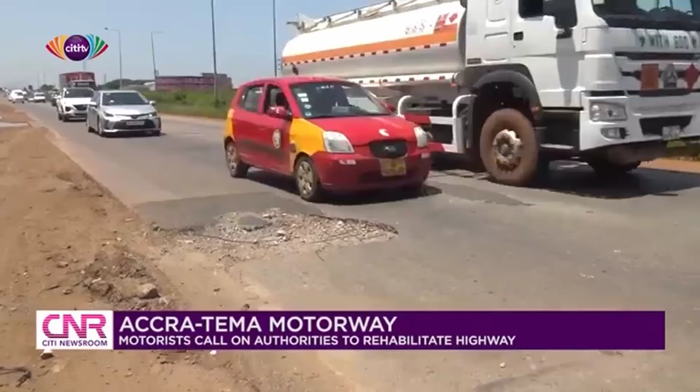Beyond its design life and capacity, the once pristine expressway has become riddled with potholes, contributing to difficulties driving. One needs to be extra careful when driving on the Accra Tema Motorway. The road, constructed over 50 years ago, has become very difficult to drive on because it has been taken over by potholes, patches, and bumps.

Apart from the factories, Martin Esiedunate also throws a spotlight on the Tema Motorway, one of Kwame Nkrumah's foremost projects. Take a look. 57 years since its construction, no major work has been undertaken on the stretch. It was constructed by Dr. Kwame Nkrumah's administration in 1964 and opened to motorists a year after.

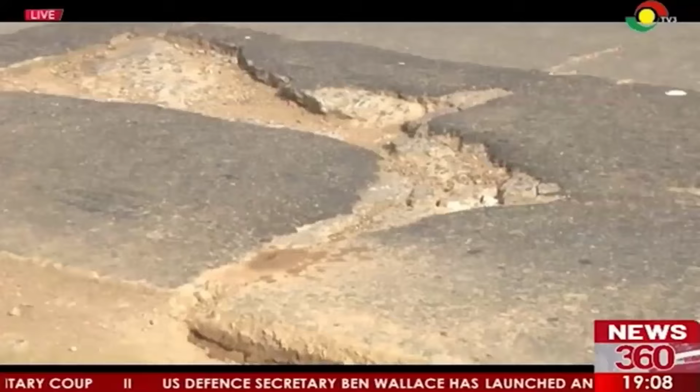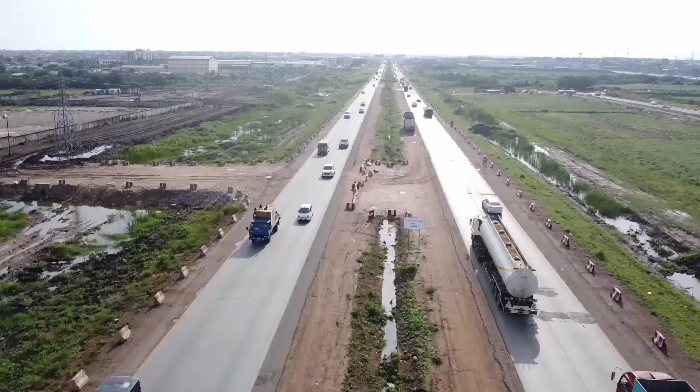It is the foremost link between the harbour city of Tema and Accra. This strategic asset, delivered by Ghana's first president, Dr. Kwame Nkrumah, requires an upgrade that will usher Ghana into a new dawn of connectivity where businesses and economic activities thrive through a reliable road network. This must be done with limited to no interruption to daily activity of road users.

This led to the conceptualization of the Accra Tema Motorway and Extensions PPP project, which runs from Tema to circa Accra, a 27.7 kilometer project linking N6 and N1, divided into sections as follows.

Section 1: the 19.5 kilometer Accra Tema Motorway and extensions on Liberation Road from Old Polo Junction to Emmanuel Eye Clinic Junction. Section 2: the 5.7 kilometer George Bush Highway to Apenkwa Interchange. Section 3: N6 linking to the N1, 2.5 kilometers from Tesano through Apenkwa Interchange to Neoplan.

The Accra Tema Motorway and Extensions project could not have come at a better time. Fast forward to 2024, the government cut the sod for the commencement of the reconstruction of the 19.5 kilometer Accra Tema Motorway and Extensions PPP project. This was pursuant to a strategic decision to deliver the project under a public-private partnership.

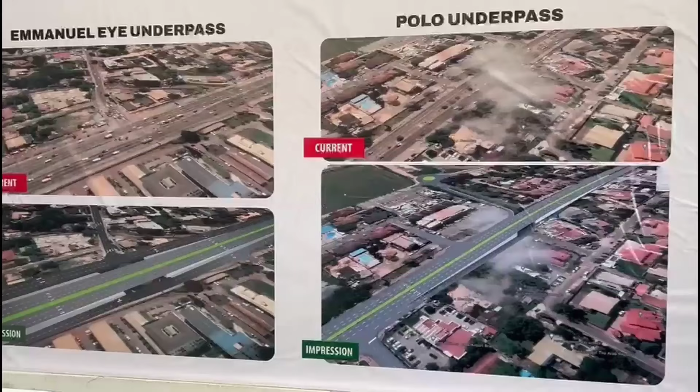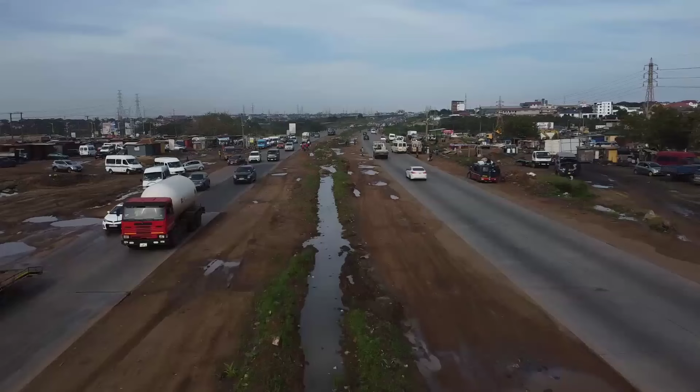This novelty in Ghana's road sector is underpinned by a concession agreement between the Government of Ghana, acting through Ghana Highway Authority, and ATE Expressway Limited, where the latter is responsible for the financing, construction, operation and maintenance of the road for 30 years. ATE Expressway Limited, a creation of the Ghana Infrastructure Investment Fund, ensures that maximum funds are raised from the market, but majority ownership remains with GIIF on behalf of the Ghanaian people.

I express my heartfelt gratitude to the officials and professionals from the Ministry of Roads and Highways, the Ministry of Finance, the Office of the Attorney General, Ghana Infrastructure Investment Fund, and consultants, whose tireless efforts have brought us to this moment. It is instructive to note that the Accra Tema Motorway, which has served the country since its construction.

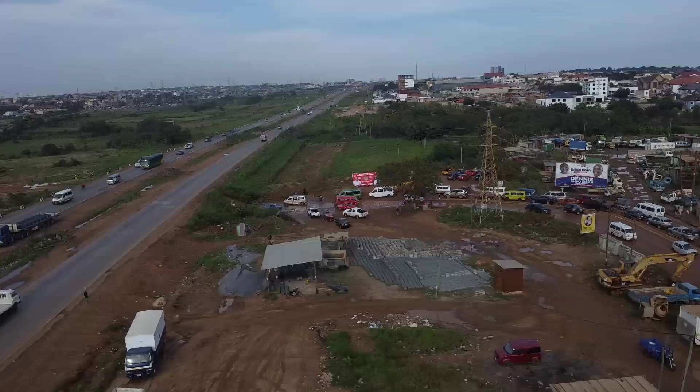Day in, day out, there's an accident on the motorway. This is due to...

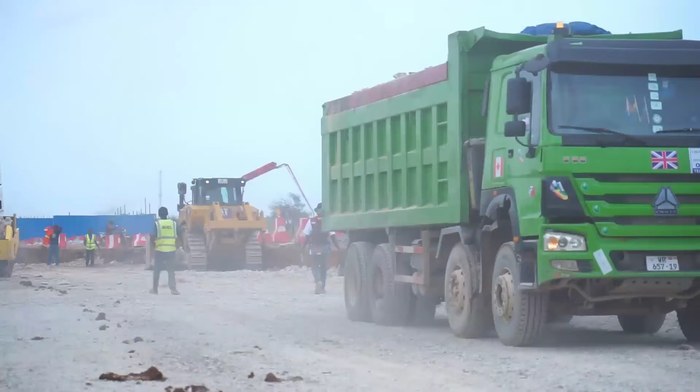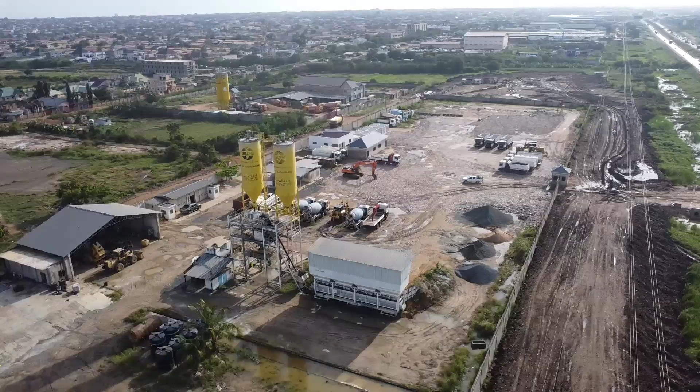Has been quite remarkable. As I said, it's on track according to the works program. Indeed, the first 6 months was designated for the design. But because he is a local contractor, he has been able to combine the design period with some early works, as we can see.

Key components of the 19.5-kilometer phase of the project include reconstruction of two fully access-controlled two-lane concrete paved expressways, construction of two partially access-controlled three-lane asphaltic paved urban highways on either side of the expressway serving as service roads, and reconstruction of Tetteh Quarshie interchange.

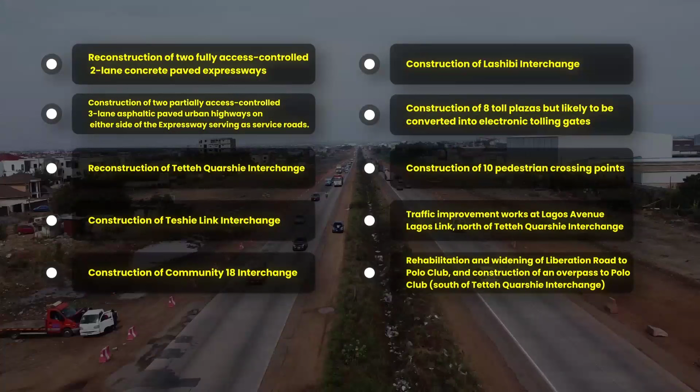Construction of Teshie Link interchange, construction of Community 18 interchange, construction of Lashibi interchange, construction of 8 toll plazas but likely to be converted into electronic tolling gates, construction of 10 pedestrian crossing points, traffic improvement works at Lagos Avenue, Lagos Link, north of Tetteh Quarshie interchange, rehabilitation and widening of Liberation Road to Polo Club, and construction of an overpass to Polo Club south of Tetteh Quarshie interchange.

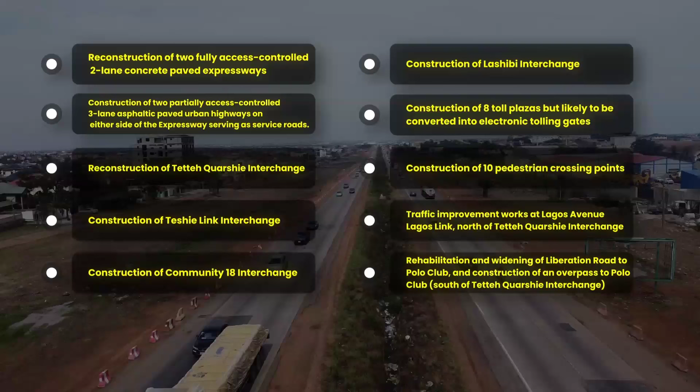The project is very good because when you think of the future, it's a boon. But for now, I think the contractor may be moving a little bit hurriedly. The expansion of the road will at least ease a lot of traffic.

That is one main thing on this road now. Sometimes around early in the morning, from let's say 6:30 p.m., and early in the morning around 6:30 a.m., there's serious traffic, both going and coming.

We will engage government at any opportunity that we have to tell them that the right thing should be done. And with the pedestrians and drivers, as I said, education. Once they are made aware that if they do the right thing, accidents wouldn't happen.

And then even they are also part of the maintenance, because if you are driving and then you park anyhow, leakages and other things, that also affects the quality of the road. So education, and getting them to do the right thing.

And we as traditional leaders will also add our voice to ensure that the right thing is done. Stop work should be a no-no. No matter which government is in power, at least if we are able to appreciate the urgency or the importance of projects and see the need.

If you read political meanings into everything, we will not make any headway. So it's important to observe this principle of continuity. That will guarantee a better atmosphere for us to live in.

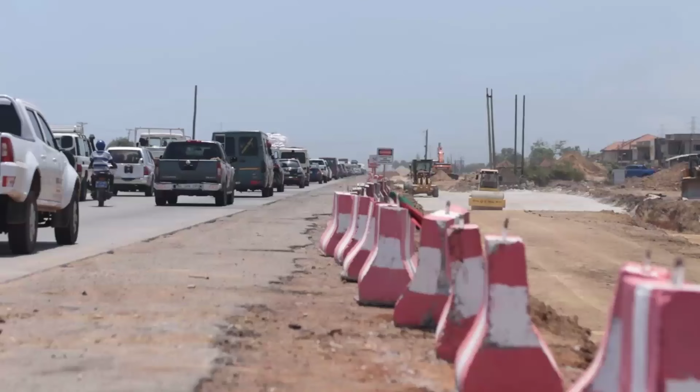We call them Jersey barriers, those big concrete things that you see. Those are the demarcating barriers that we have for now. And what we are doing now, sometimes the reflective part is gone, so we are repainting.

And we are actually, in the night, you will see some light on those Jersey barriers. So that is just for safety measures.

We have a dedicated team on the ground who are ensuring works. We add that a lot of the challenges that sometimes we have with road deterioration also have to do with the use, because roads are designed for a specific purpose, obviously for transportation, for a specific weight class, for a specific number.

So my appeal to motorists is that please let's exercise the greatest caution on this road whilst construction is going on, because we are constructing not for ourselves, we are constructing for you, and therefore there's a need for us to collaborate and work together for the good of the country.

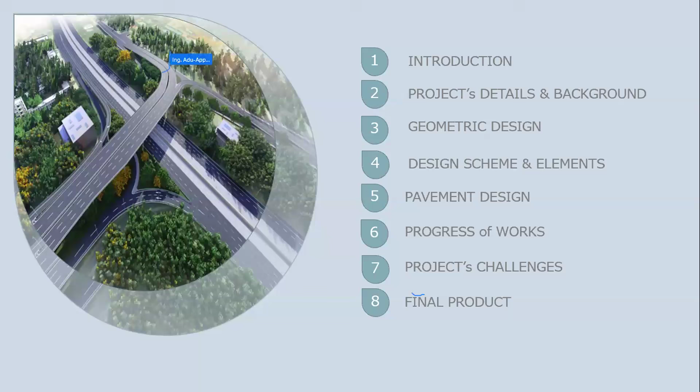I know for those of you who have passed this road, you may have seen quite a lot of work going on. But then it's all jagged up, and you probably might not be aware of it.

And we will then talk about our challenges, because when we are doing these things, some people think that everything is smooth sailing. I know for you engineers, that road construction in Ghana is not that easy, especially when you are working in an urban area.

So we'll then go on to give our conclusions. We already know who the employer and the funding agency is. You heard that this is a PPP. I know some people have questioned where is the other P. I did mention to you that, yes, the private sector is reluctant because they foresee risk when this has never been done before. So the special purpose vehicle company, that is the AT Expressway, is fully funding the phase one, that is the construction of the phase one.

And I'll be explaining to you, and I guess you've seen we have phases 2 and 3. But then they will fully fund the phase one through GIIF, that's the Ghana Infrastructure Investment Fund. And they will then go to the market, because the market will see that yes, we've been able to construct 19.5 kilometers of the 27.7 kilometer road. So they would come forward, and I understand some people had shown interest until a few things happened. So that then they will come and put their money for the rest of the project.

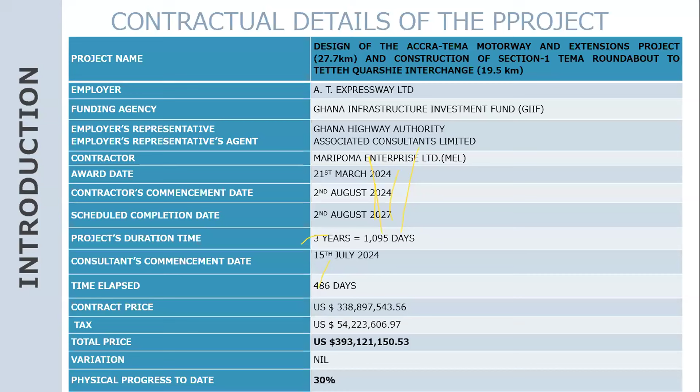Some people are only interested in the contract price. It's 338.9 million with a tax component of 54 million, making a total price of 393 million. So far, we've done about 30% of the project.

The project background: this is part of the national routes. So let's say route Ghana - the Ghana Route 1, which is the N1 that we all know, N4 which is the Aburi Road from Tetteh Quarshie, and the N6, the Accra Kumasi Road, and of course it continues. Then the other arterials, we mentioned the Liberation Road and the others.

The whole idea is that you also want to improve mobility and accessibility within this area of Accra, Tema, Aburi, and the Samam roads, and also to enhance regional integration.

This is the main route from our eastern neighbors to our western neighbors, Togo, all the way to those northern countries. If you want to go to La Côte d'Ivoire, the N1 continues all the way there. And if you branch off on the N6, you can go to Burkina Faso, Niger, and some parts of La Côte d'Ivoire.

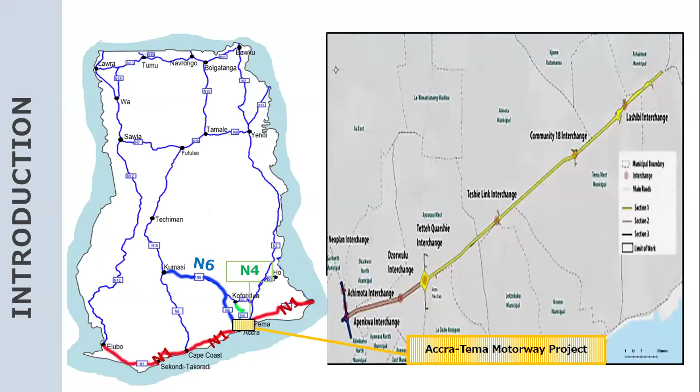Our scope is to rehabilitate and expand to a minimum of 10-lane divided highway as a minimum, and comply with the level of service requirements. It will have 2 fully access controlled...

Expressway - so currently the rigid pavement, meaning the concrete paved section, will be an expressway, which is a 2-lane dual carriageway. Then we'll have a 3-lane urban highway in asphalt, which we'll call the service road. The service road will not be access controlled.

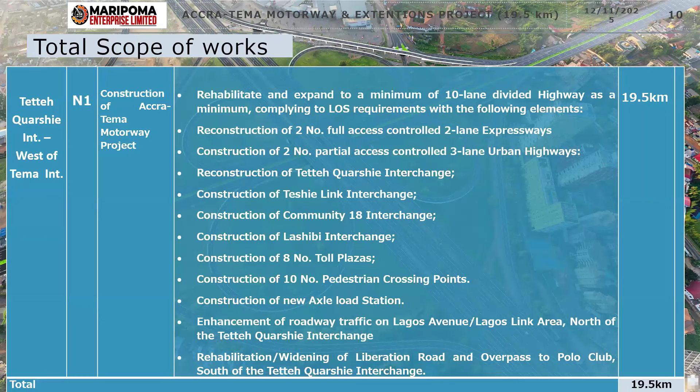Many years ago, I visited a certain country, and as a student, it was a shock for me. They had only about 30 kilometers of highway, and they had a whole operations and maintenance yard which had everything. So here the KPIs might be that from the appearance of a pothole to the repair of that pothole is, let's say, 24 hours. So if anything happens, it is repaired immediately. A stitch in time.

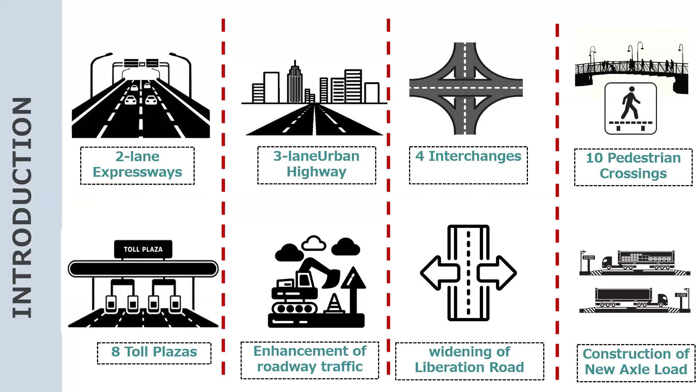Again, still trying to push down what we are doing. So we are having various elements of the general layout, and you see the various facilities are provided. You have the Tetteh Quarshie, which we all know. There are footbridges at various locations. Teshie Link interchange comes first. We have various footbridges along then the Lashibi. We know the Lashibi interchange. Then one, we are not touching it, so that is not going to happen.

So let us just look a little bit at the geometric profiles. I'm just showing you a plan. This is the flower pot, kilometer 2 plus 900 to 3 plus 090. That has been completed, and we can see the profile there. And then we have another one here at kilometer 5 plus 700 to 6. That is a Teshie link that will join to Manet.

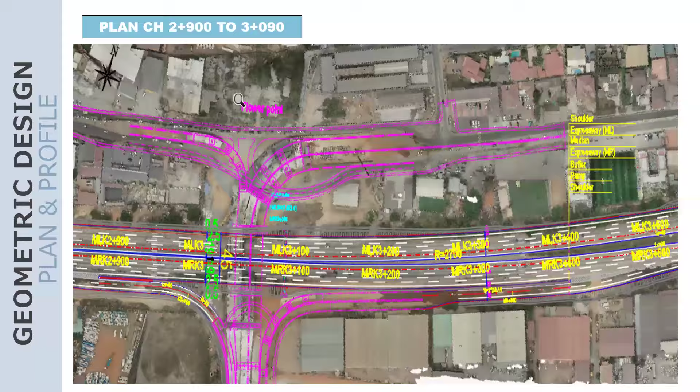So the main carriageway will be in there, that is the expressway, and then the urban highways will be on either side. So if, for instance, you wanted to go back, you can just come to the roundabout. This is what we call the dumbbell interchange. So you come here, and then you can go out again. Or if you want to continue to the various locations, this one will link you to the Spintex Road.

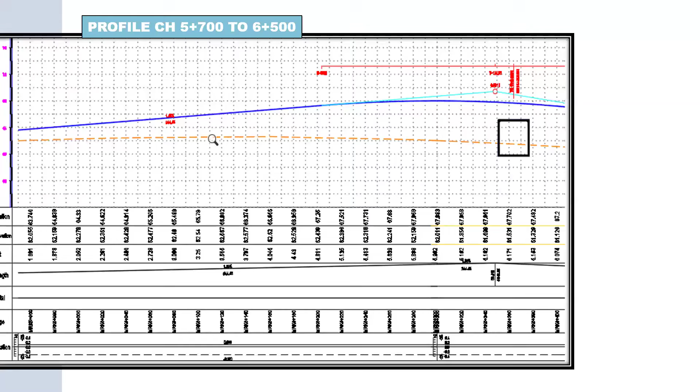Okay, now let us look at the existing rigid pavement, which will be maintained, but we will do more of an overlay. This overlay has been designed for concrete, so this is the 2-lane concrete section, but asphalt will be on the urban highway.

But then there are certain sections which are going to be mixed, so we have mixed-use sections that will allow you to change from the service road or urban highway into the expressway or vice versa. So maybe you want to get off somewhere, you can come in there and make that move. That's where you'll find all 5 lanes together, and we have them at either end of the Accra Tema Motorway.

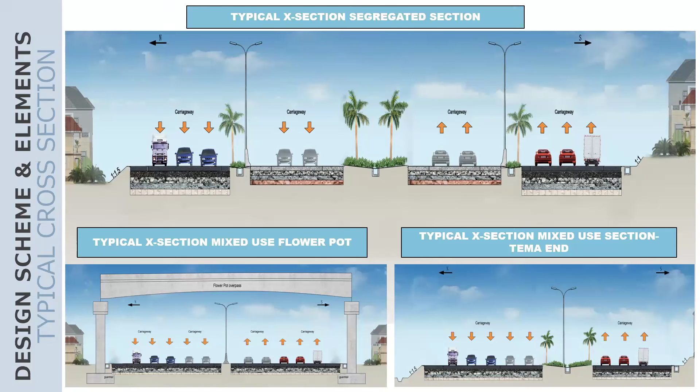Okay, continuing with Tetteh Quarshie, I told you we are expanding Tetteh Quarshie. For those who have passed through, we have already finished the substructure and are preparing to launch the superstructure very soon. Once the beams are ready, we are using T-beams. I'll show you some interesting construction details, just schematic, so you know the process of undertaking these.

So for the Teshie link, currently there's no connection. We have to demolish some houses, and that will link to that area. This is how it's going to look like. So when Tetteh Quarshie is completed, this is how it will be.

Let me see whether this works. Now once you get here it wouldn't show, but anyway, let's move on. I can show here - currently this is what we are doing, this one and that. The middle one is already existing, so we are adding a bridge on either side of the existing motorway. This is how the construction would look like.

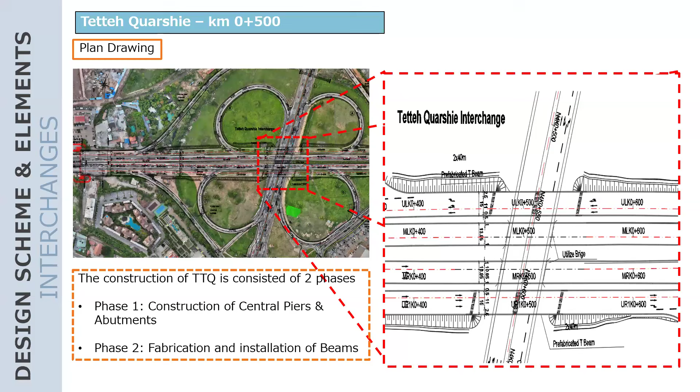And then we would have our T-beams, which will be launched. I'm sure you've seen some cranes being erected there. We will produce the T-beams there and they will be transported to the bridge - mostly when you are going towards Tema. That's how it's constructed, and as you can see, typical foundation, then your piers, and then your beam seats, all clearly shown.

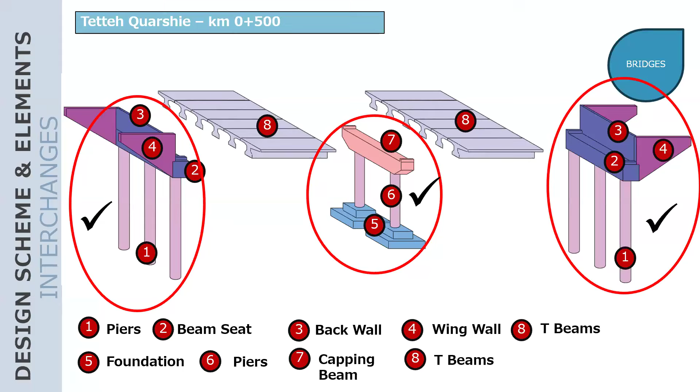Then for the underpasses, I believe you've seen some work going on there. Some are very far advanced, and we have done quite a few diversions - if you look carefully, we started by first building those on the urban highways on either side of the motorway. Once completed, we diverted traffic and started working on the road, which is why we are going round it.

So this is the cross section of what we are doing there - a slab of 1 meter, and those. I'll show you some pictures for those who do not use that section, to have an understanding of what is happening.

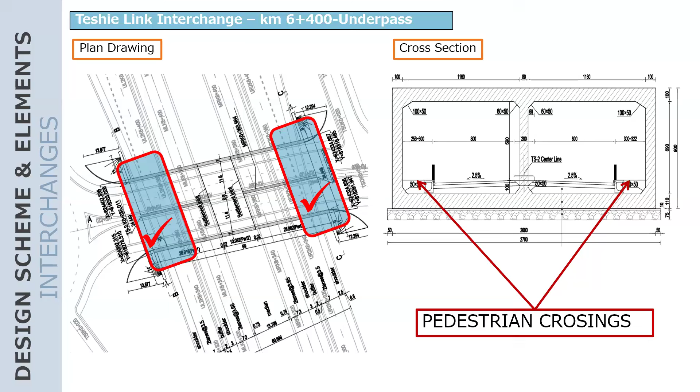Also, before this, Community 18 links to the All African Games Road, all the way to what we call University Farms Road. University Farms Road will go to School Junction and all the way to Pokuase. The good news is that up to School Junction will also receive some construction works - it's also going to be an 8-lane construction, and I'm hoping within the shortest possible time, we are starting the studies from the beginning of next year.

So again, when we are done, you remember there's something like this here - this oval roundabout, we are going to enhance it so it will allow for a connection to this road which has already been constructed. We are going to link it, and that will go all the way to the University Farms Road. Then the Lashibi interchange.

As for Lashibi, we know those going to Klagon - it's a nightmare, it's a nightmare. So once we are done - we have not gone too far, but at least some work has been done, we will have a look at it. This is how that is also going to be done, the before stage and then the proposed.

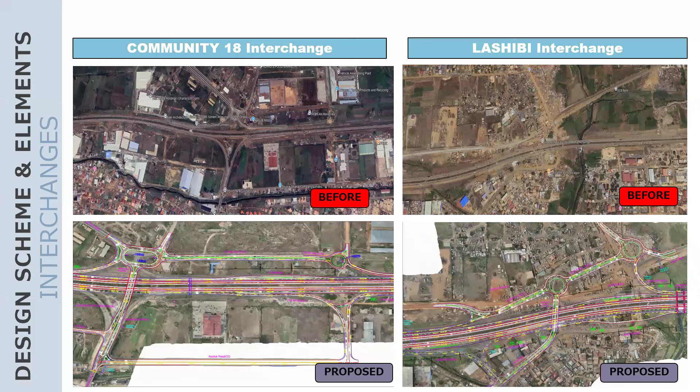Okay, so again, for you to see how the cross sections are going to look like - all these ones have been constructed. Again, for traffic management, because we could have just blocked the road, but unfortunately for some roads in Ghana, we don't have alternatives. We just have to manage the construction to ensure traffic is properly managed, and that is how the cross section is going to look like.

Those who try to overload and cross Ghana, our height limit is supposed to be maximum 5.5 meters. But you go around Achimota, everywhere, they are hitting what we call bridge strikes. I remember when we were doing the Pokuase interchange, I said for a post-tension bridge, it has a lot of energy stored in it. And if there's a bridge strike, if you're not careful, it could blast like a bomb. It has happened before.

You cause a relaxation of the tendons. There are tendons in them, and you can cause anything to happen. So we lifted it to 6 meters. We would want to test.

When you work in the road sector, sometimes you wonder - they are the same people causing the problem, then they come and blame engineers. Well, engineers too, some of us are trying, okay? I remember just a few days ago on TV, somebody asked me why our roads are failing. What I told you earlier, I poured it out, and some more. But that will be a discussion for later.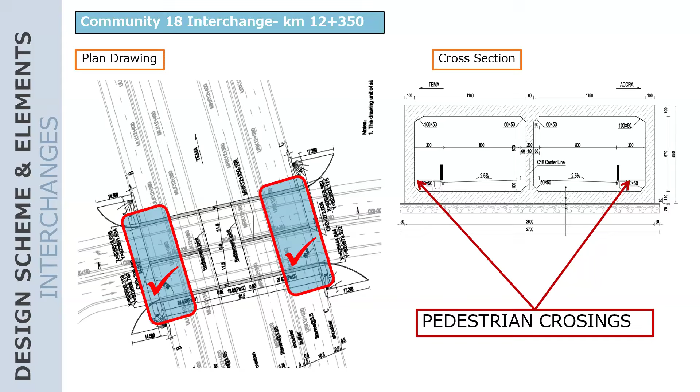Again, Lashibi is going to look similar. Now we have about 3 river bridges at various sections. Currently what you find out there is that some of them are proper bridges, others are just culverts. And there have been times when they have been overtopped.

What we do, of course, is take care of that change - we design for a 50-year return period, and the return period can happen tomorrow. With the 50-year return period, or 100 years, you want to find out what would happen in case of the 200-year design flood.

For other smaller culverts, we test for, I think, 100 years. I'm not a drainage engineer, but at least I hear them saying it, and I understand what they've been saying. So there we are using T-beams, and we are raising the road to have enough capacity to pass the design flood.

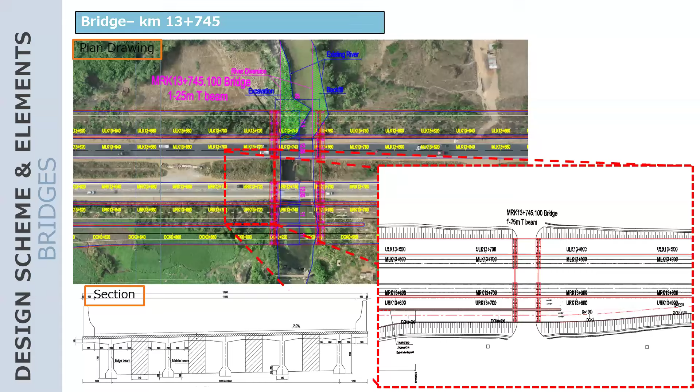Let's look at the other bridges. So for the bridges, this is how these are single span, that is simply supported bridges. That's continuously supported beams, but even that, it is still simply supported, from abutment to abutment. And I've already explained this already, so let us move on.

But here, you see something here - do you see a difference? Who has noted any difference? Piling. So here we have piling, because that portion of the road has a lot of black cotton clay. I'm sure those of you - they are very, very deep. I think you've been doing 20 meters, 20 piles. And these are not even end-bearing piles, because end-bearing, you probably go and meet the competent rock. But here, you will have friction piles.

Okay, so we are using piles. We have a group of piles, then there's a pile cap, and on top of the pile cap we're building abutments. So this is the difference with Tetteh Quarshie, where Tetteh Quarshie is wholly underlain by rock, igneous rock, or granite.

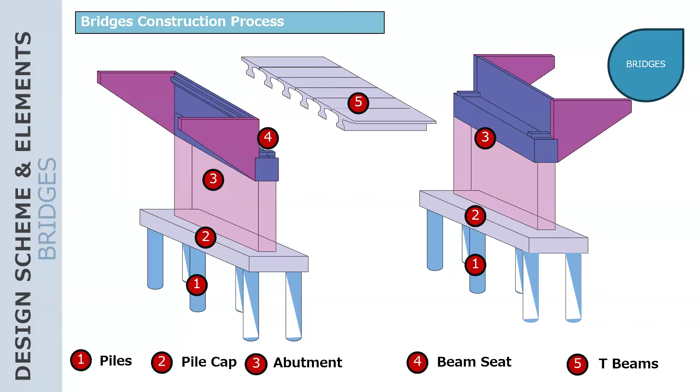I'm sure you have seen some of the piers springing up like mushrooms overnight. So when you go there, you find that. How many have we done so far? About 3 or 4? 3, yes, 3. But all these ones are on piles. These piles are generally deep foundations.

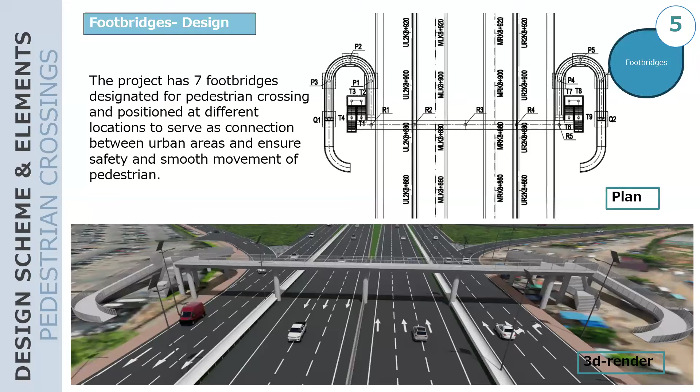So again, just to show you this, the various parts: the ramp piers, central piers, the deck, the ramp, the stairs, and everything. This is how we undertake the construction of these structures. I think so far I'm doing well - I'm not bringing in too many equations, so these pictures you will remember.

Then we also have a number of cross culverts or cross drainage structures - pipe culverts and box culverts. And all these culverts, when you go, you realize we've demolished all the existing culverts and are building new ones. We are doing that in view of the challenge of overtopping.

And then looking into the future, we do not design using historical data and just project it in. No, we say that yes, historically this is what has happened, and that's why these ones have been there. But looking into the future, there's a lot of development coming around, so the runoff is going to increase. Extreme rain events - nowadays sometimes the rain in December is very heavy. In the past I don't think it was raining that heavily in December, but now it is. Even yesterday it rained, I'm sure today it might have rained too. So we are taking care of all of this to ensure that the structures we put there will still be working for the next 200 years.

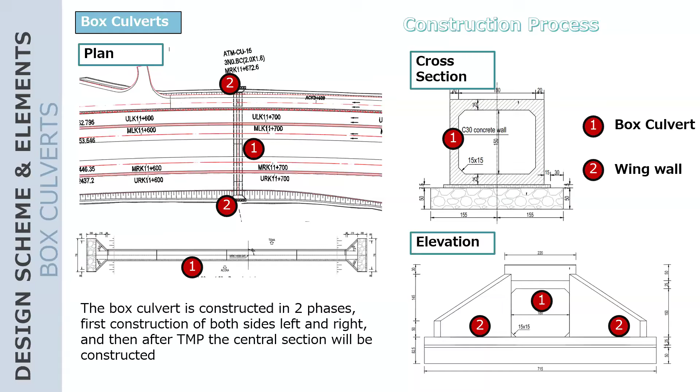Then we also have some longitudinal drainage structures, and here we are using U-drains. We have curbs that ensure we have gutters that take off the water or runoff water from the road - this is road drainage. That's why you have maybe 450, 600, 900 drains. They are not storm drains, these are road drains to shed off water from the road.

Because if the road gets flooded or you don't have adequate drainage, you know what is going to happen? At that pace, you have what we call aquaplaning. And with aquaplaning, you lose friction on the road.

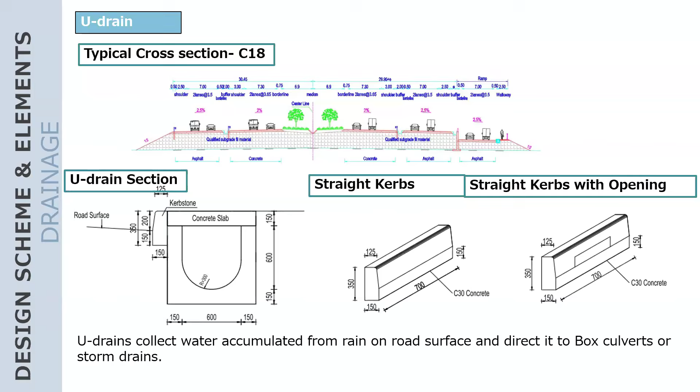Where we have speed humps, the impacts all destroy our roads. But the safety people say we need to provide it, because our drivers - when you are supposed to drive at 50 kilometers per hour in town, they'll drive at over 100 kilometers per hour.

So here we have quite a number, I don't remember exactly, but probably 16 or so. Has somebody counted? Oh, if I were sitting there I would have counted. How many? 16. Okay, so it is still in my head, because I counted some time ago.

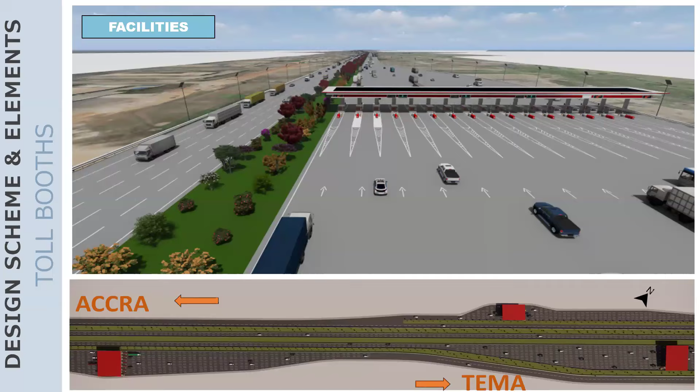With time it will deteriorate, and then you go down. I also mentioned the administrative facilities, so there will be administrative facilities provided for O&M. Then we also have weighbridges at various locations. So now let's look at the pavement design.

See the calculation. We have some calculations to at least show you that these projections were taken into consideration, because for concrete pavement design you have to consider traffic. That is the main load, just like load, response, and material. So traffic analysis was undertaken, growth rates were looked at, and the various allocation of traffic onto the expressway and the urban highway were also done.

Here you can see the ESALs, remember I talked about the cumulative loading. For the design period of 20 years, the ESALs, equivalent standard axle loads, cumulatively were about 146 million standard axles for the expressway, and about the same for the mixed-use areas where you have all 5 lanes together. These are the elements that go into the design of pavements.

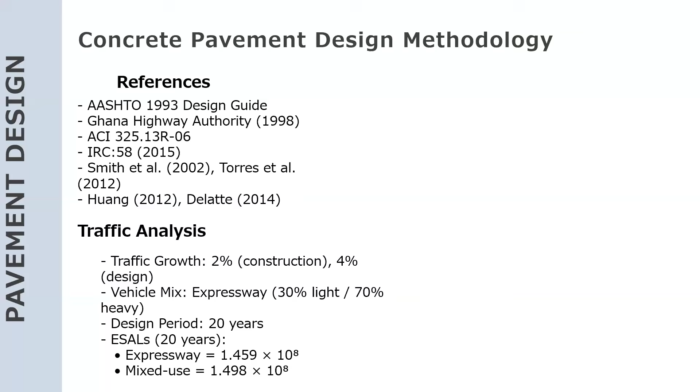So this is the actual design equation, but we also have other equations used to estimate this loading. Sometimes you do actual weighing of the vehicle axles. We have portable weighbridges that we use, and that's where we find out that a lot of people are overweight. Invariably, we have axle loading points where the axle loads are checked.

I don't know whether you heard recently that they are now going to increase the penalty. Who heard it? Do you know how much you're going to pay? It is 5,000. If you overload now, you pay 50,000. So if your fare is worth that... well, the minister made a joke that sometimes they do things, you understand? They do things. The hearer must understand. If you don't understand, yes, then if you don't get it, you don't get it. So then what happens is if you got 50,000 and you're ready to pay 20,000 as a bribe, well...

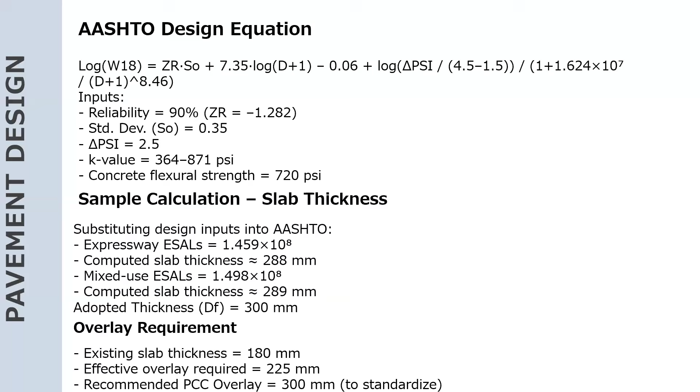Here we are looking at 300 millimeters of pavement for the concrete. But then the contractor also had suggestions to the pavement, and that is being looked at. For now, we also have the asphalt and everything else, so that is the pavement you have for the asphalt.

That is where you have, where is it? Okay, this is for, now there's something very interesting. You see on top of the existing pavement, okay? Now because it is cracked, what we have done is surveyed the entire road. Wherever there are, you see, what happens is that pavements, because they are jointed, the joints must always be sealed.

If they are not sealed, and that is the question of maintenance, water enters and then there is pumping. The fines will come out. When the fines come out, there will be, I don't know what to say, gaps, or is it gaps or holes under the slab.

And once the vehicle goes over it, sometimes it will break. So that's why you see some of those break, especially along the edges - a 45-degree break or faulting. So what we do is wherever we have challenges like this, the existing slab will be removed. The slab there is 12 by 4, 12 by 3. They will be removed because it's also reinforced, then repaired before we put on another layer.

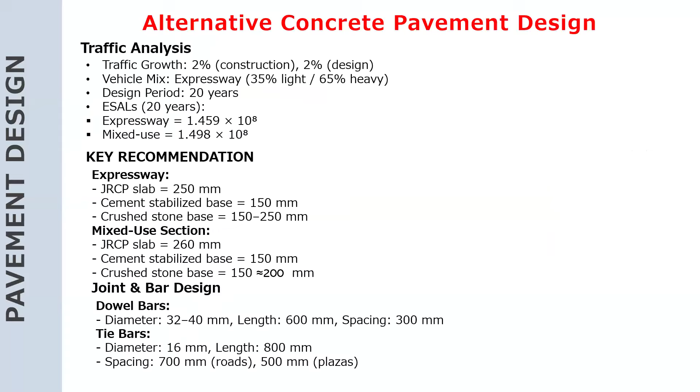But I believe you also know that the Abidjan-Lagos corridor passes through Ghana - almost 60 or 70% passes through Ghana. And when that also comes, that is likely to reduce the volumes on this new road we are constructing, that is to the north of the motorway. It will not come through here. And maybe when the new Accra-Kumasi Expressway is completed, I don't think it will take traffic from here, because the alignment is different.

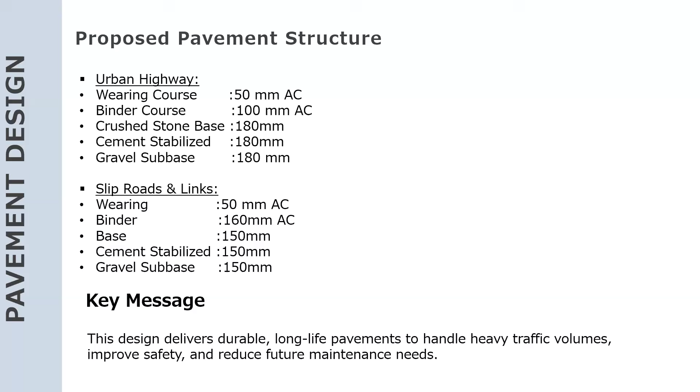Okay, so let's look at some more in terms of the urban highway. This is the pavement structure. So whatever you see there now, we have just done the earthworks. We've done up to what we call the formation level. So it is on this formation level that we'll have this structure to form the entire pavement of the motorway.

That is why recently I was talking to a classmate of mine who is a professor in South Africa. He says now we are even moving away from putting so much emphasis on design. You can design the best that you want, but then construction supervision - that is why you need to ensure the selection of materials, getting good materials, and ensuring we are going according to quality assurance and quality control. They are very well managed.

Otherwise some people bring asphalt and it's already burnt, because asphalt is supposed to be laid at a certain temperature, compacted at a certain temperature. Somebody will come, the temperature would either be too low or too high, the bitumen would already be burnt. It is DOA - dead on arrival. It will not stand the test of time. So these are things that we need to be careful about.

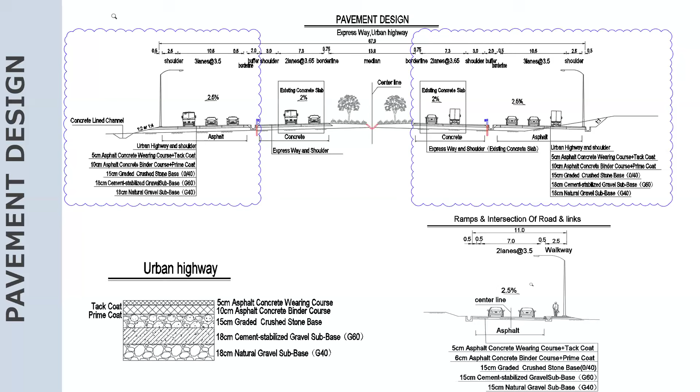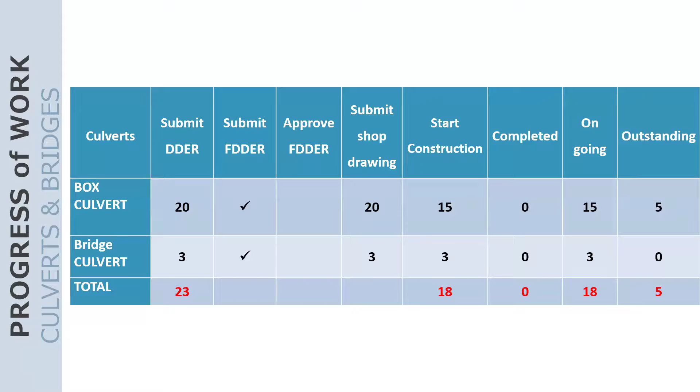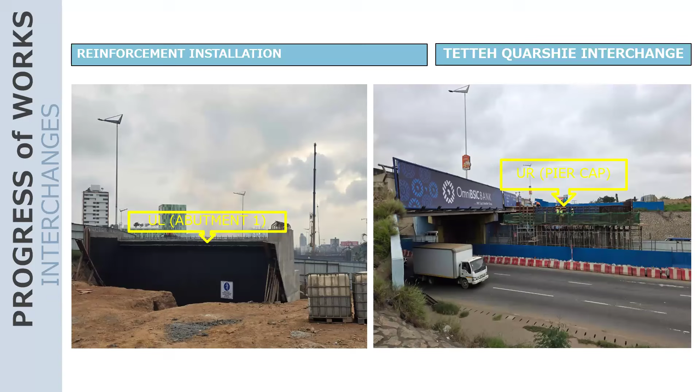You remember I told you we started with all 3. We have not finished - we have a number of the box culverts not done, but in terms of the interchanges, we finished with the substructural concrete works for the Tetteh Quarshie interchange, for the one around kilometer 6 plus 080. That is the tertiary link.

We are working on the retaining walls, because with the Accra Tema, when you have too many projects, sometimes they mix in your memory. So the Accra Tema Motorway would go over the crossings, so that those who are overloaded will not have those bridge strikes that we mentioned. And the same is here. So we can see that we've started doing the retaining walls around these areas, and they are moving very nicely.

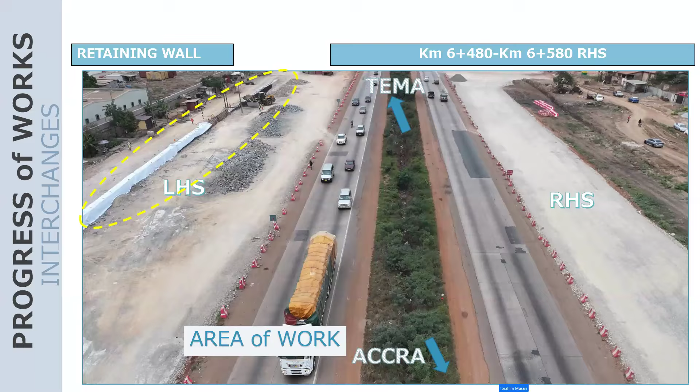So that's it, we've worked on these boxes on either side, the right-hand side and the left-hand side. I think we started working in the middle, so this picture is even old. Community 18 too, similarly we've done quite a lot of work there. Very soon we'll be able to join them.

Just showing some of the works and how we do them. This is the concreting operation using the concrete pump.

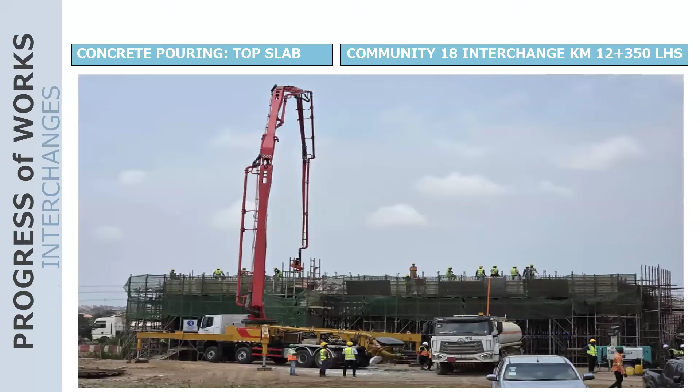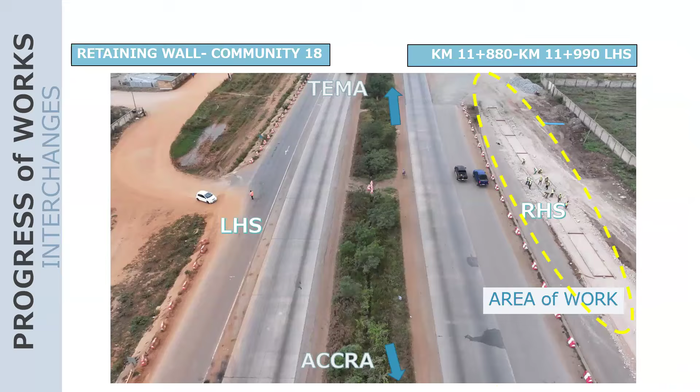Community 18, retaining walls. And then the bridge, remember I talked about piling. These are piles. Yeah, the piling rigs, we have two types: drilling and percussion. So we are using the percussion method. We'll not go into the details, but if you want the details, we can talk about it.

Yeah, so they've done quite a number of them already. This one is getting to the end.

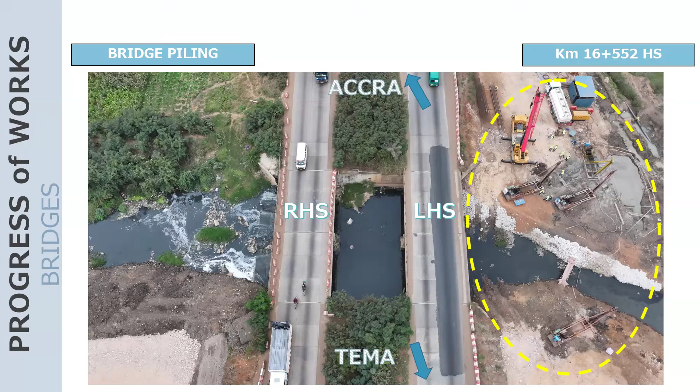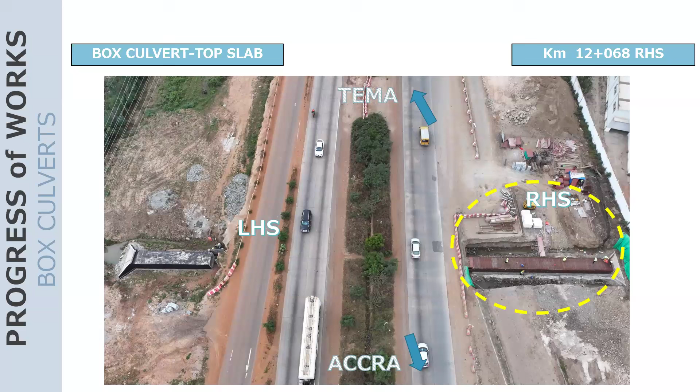We'll just show you some of the works there. These are the U-drain and also the earthworks. So these are all earthworks that we are currently working on.

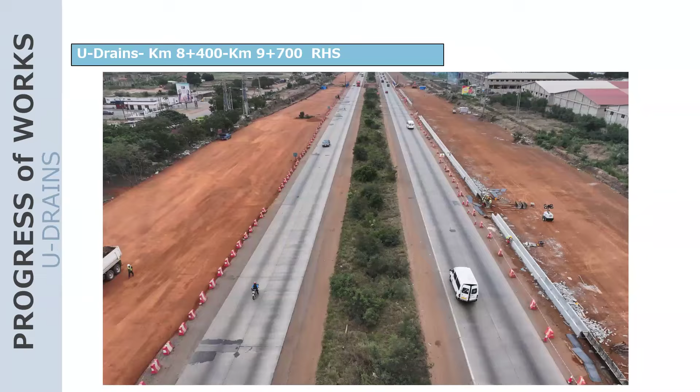So the piling rigs are on either side. The subgrade filling, or the earthworks, have all been done, and we continue to do that.

We've already started. Have you completed the sub-base testing? First layer, okay. Once that is done - because everything we do, we have to trial. There's always a trial session for pavements. We want to ensure that the equipment they intend to use will be efficient, and we will get the quality we want in terms of compaction and everything else. Even the asphalt, we have to do a trial session. The concrete, we would do a trial session before we lay it, so we have that assurance, because there's no trial and error once we start the work - you cannot finish and come and demolish. The public will think we are wasting money, even though we would have asked the contractor to demolish at its cost.

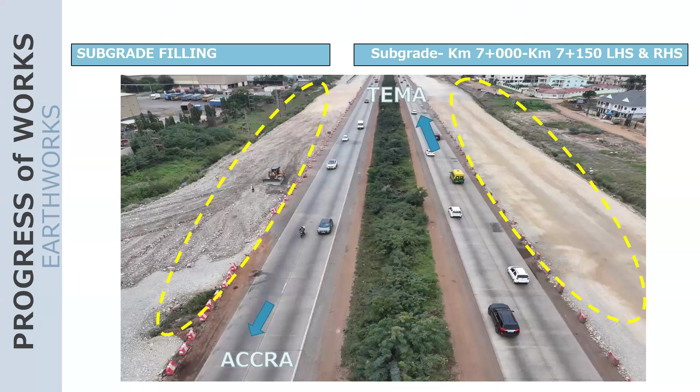So just showing what we have done so far.

One distinct thing in this area is that we have the black cotton clays. In the southeastern portion of Ghana, you have these clays, and they are very, very expansive. What that means is when water gets into it, it expands, and when it expands, any structure in its path will have to give way, whether it is a building or a road.

During the dry seasons, it becomes very hard when exposed to the weather during the dry season, but when it gets into water, it becomes very soft. So they are highly susceptible to moisture. For roads, we have to make sure we take them out and build a pavement on top, even crushed rock, to ensure that water does not rise through capillary action. Because with clays and fine materials, you might not even have high groundwater, but it can still rise through capillary action into your pavement.

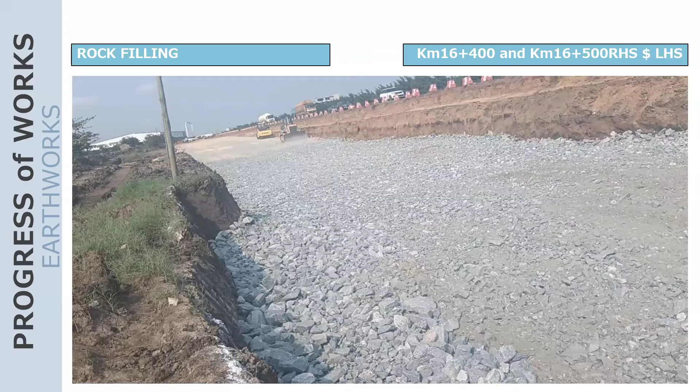After that, we put on our material just like we do that. We are getting most of these materials from the Pokuase area - that is for the earthworks. The area is called Katapo, close to Pokuase. All those Pokuase hills, we are cutting them and bringing the material in, and then we sell the land.

So you see, rock fill to ensure the longevity of our road infrastructure. So if anything should happen, the foundation should not fail - maybe it is the surface.

That's why we are designing for what we call the 20-year design period. When it is time for rehabilitation, we don't need to go down - we only come and do either resurfacing or overlay, and we are good to go.

But if you don't design well, there are some roads where when you pass on it, it will be undulating like that - that is a structural failure. That's why it's called a structural failure, and when there's a structural failure, you have to go down and undertake structural repairs.

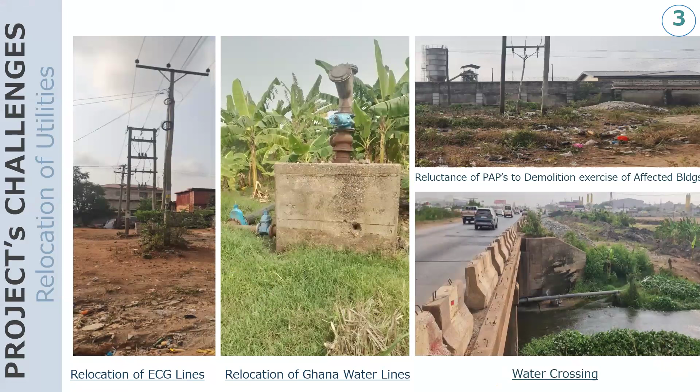So what are the challenges for me working on roads? This has always been our challenge, and we seem not to have a handle over it because our politicians are always in a hurry.

Their challenge is go, and we have our marching orders. And you go, and then there's electricity, or there are electricity lines to be relocated. There are water lines - for instance, on the Tema Road, we have transmission mains from Kpong Headworks, these 800 millimeter pipes, and double, they have to be relocated. A lot of the time, for some of the bank-financed or MDB projects, the relocation of utilities has to be borne by the Government of Ghana, GOG, and you know the pressure on GOG - the project will never get done.

And then if you go from Ashaiman to Akosombo, that is a challenge we are having. There are huge pylons - maybe those ones should probably be 33, some are 165, 161, and they have to be relocated. There are huge 1-meter pipes in the road, in the right of way, and they have to be relocated too. We've not touched them as I speak to you now.

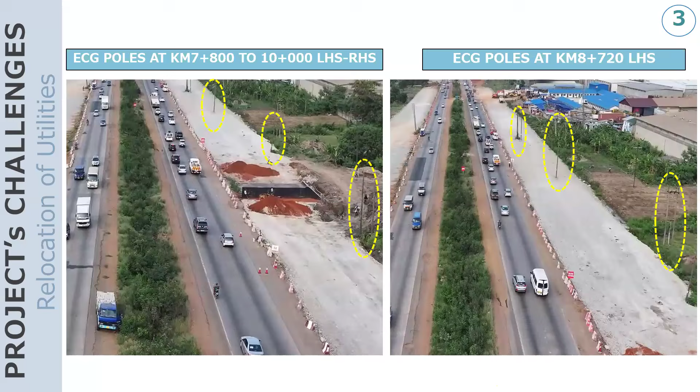We're trying to relocate these utilities along the road, and ECG has been doing very well. ECG is one company I always doff my hat to, because they come out with explicit designs and help us in supervision. I've not mentioned any other utility names, so don't go and say I said something—I'm only talking about ECG. And Ghana Water too, they've been doing well.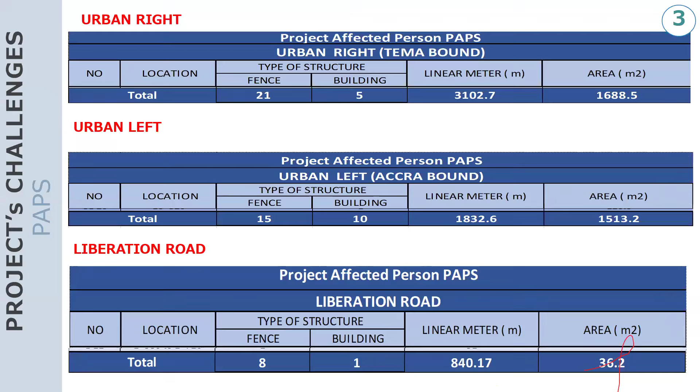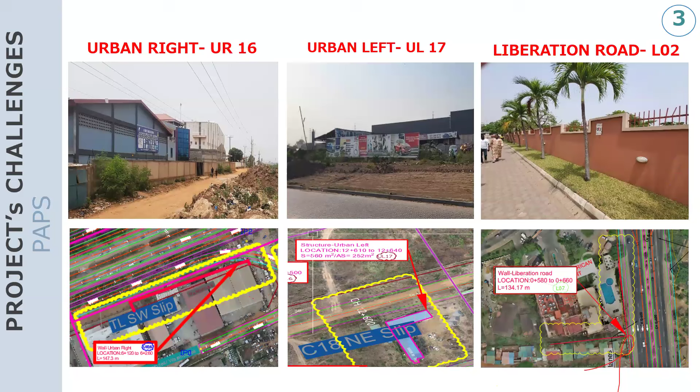Then the project affected persons along the road, which will be affected, especially on the Liberation Road—that is going to impact whether we are able to construct the interchange there or not. It's dicey. Recently I've seen them working there; I'm sure they've heard something, as they started putting up some structures there. We identify all of these things way ahead so that we work with them. If you have money, you just pay them and move on if it is for acquisition, but if they have encroached, under normal circumstances you must demolish the structures and move on. Unfortunately, we cannot do that.

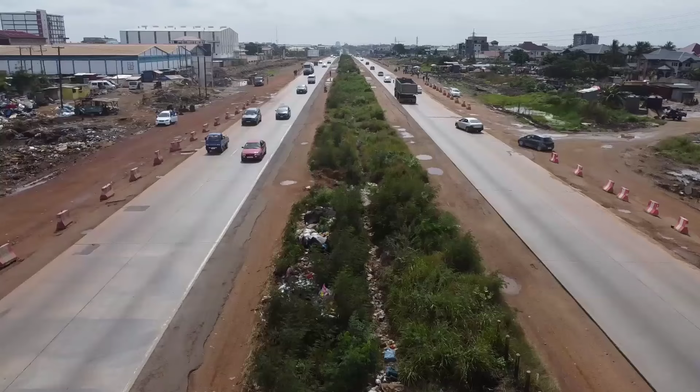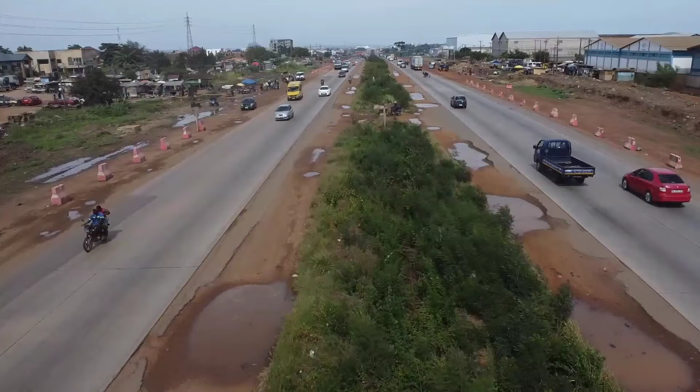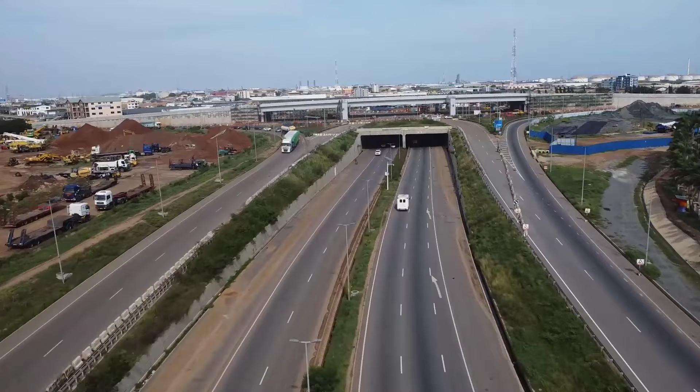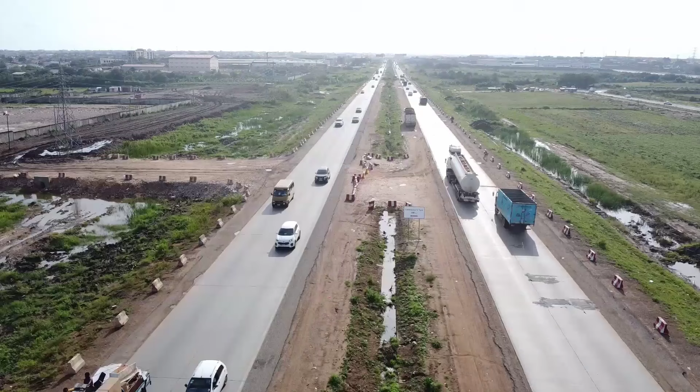On maintenance, when you have a concession, it comes with KPIs, key performance indicators. If you do not meet those KPIs, there are deduction values you pay as the concessionaire. This is something we don't have on the other roads maintained by the Ghana Highway Authority, an agency of the Ministry of Roads and Highways. If they don't have money, nobody does anything to them. But here, we have a maintenance facility being built as part of the project.

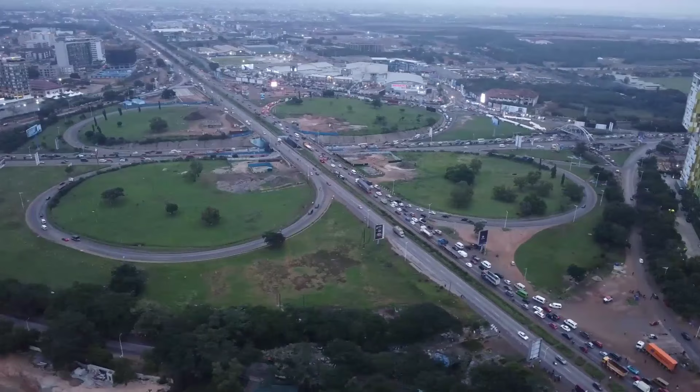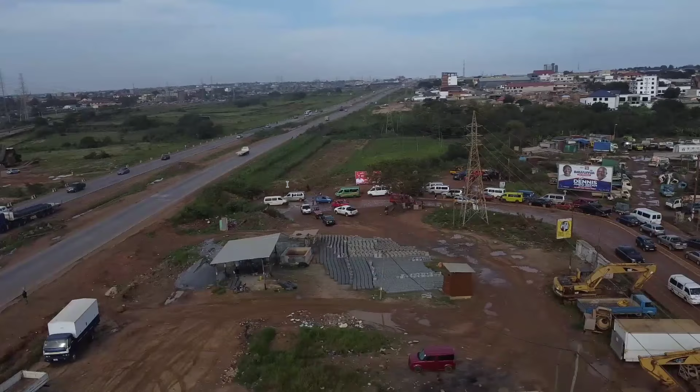So when KPIs are given, it means, for example, if there's a crack in the road, you're given 7 days to ensure it's sealed. If there's a pothole, you have to seal it within 24 hours. If a traffic light isn't working, you're given maybe 2 hours. All these are key KPIs and they will be measured.

Now, the second question has to do with Tetteh Quarshie. The challenges we have with Tetteh Quarshie are about 3: one is the capacity of the interchange itself, and then Lagos Avenue, at the eye clinic, there's a traffic light. Whenever there's traffic, it backs up and then comes into the interchange area, so those joining from the ramps are also impaired.

Similarly at the Old Polo Junction. The idea is that we want to improve these junctions to encourage free flow of traffic so that the impact of all the traffic we're bringing from Accra will reduce. But if we finish this project and don't continue onto the George Walker Bush Highway, which has some 2 lanes but we don't use it that often—it's just a service road—then you're going to bring so much traffic and there'll be a bottleneck, also at the Fiesta Royal intersection.

So you see, for roads, it's a network. You remove one problem and go to another, but it is a continuum. Today we are doing this, but if we had money, we would have done all at the same time. But we cannot do that.

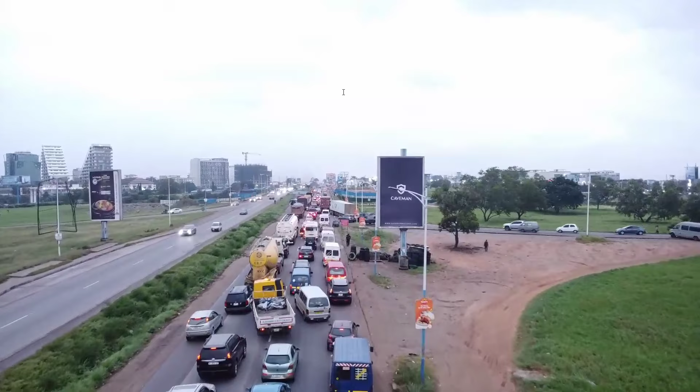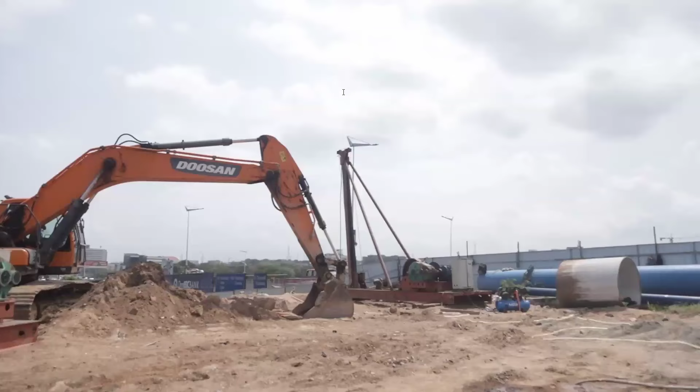So you are right, in Accra we don't have this. But they've tried to do something at the port area so that those trucks do not come there. But even now, when you get to Tema, you see the trucks parked there. So what you are saying is perfect—if you don't provide for them, they'll come and park, and you cannot blame them. I believe it's something we know, but sometimes when there's a crunch, some things are put aside with hope that in the future another project will come and we'll do it. But you are very right.